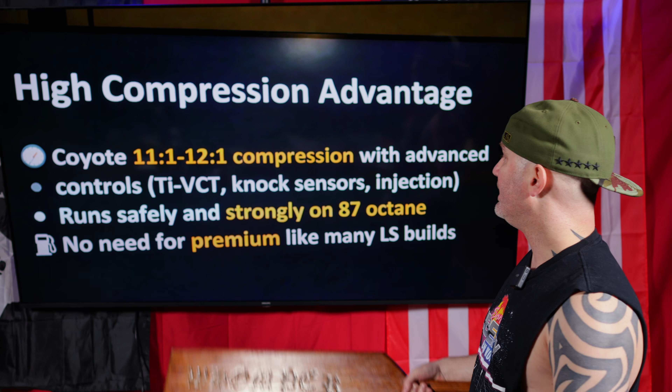Anyways, so out of the box, you're looking at 412 to 500 plus horsepower. You get modern fuel injection, reliability, durability, real world miles per gallon at a high horsepower, runs great on regular 87 octane. The Coyotes come between 11 to 1 to 12 to 1 compression, depending on what generation you pick. They have Ti-VCT, variable cam timing, knock sensors and injections. They run safely and strongly on 87 octane. I'll explain why that's important for a second, but the point is, no need for premium gas like in some LS builds. That's pretty awesome.

So, why is the Coyote one of the cheapest installs you can do? You're like, hey, when I look at a junkyard pull on an LS and I look at a junkyard pull on a Coyote, the Coyote is so much more expensive. How do you claim it's the cheapest? That's because it can run on 87 octane and it gets good fuel mileage.

So your Coyote is going to get about 22 miles to the gallon and you can run on 87 octane, so you're looking at $4 a gallon. To go 100,000 miles, it's going to cost you $18,180. Your LS is going to get about 15 miles to the gallon, and on some builds you're going to be forced to run 91 octane, which is $4.50 a gallon. So to go 100,000 miles, it's going to cost $30,000. Your cost savings on just the fuel economy alone for the Coyote over 100,000 miles is $11,820. Essentially, you're getting a free Coyote if you make it 100,000 miles on this, because not very many of the Coyotes cost over $11,000.

All right, now there is a difference between the F-150s and the Mustang Coyotes, they are not equal. The F-150 variants are made for trucks. They're durable, but again, they're made for trucks. Mustangs, you're looking at higher horsepower, high rev, short runners, advanced camshafts, stainless steel headers. Your F-150, you're looking at torque focused. It's going to have long runners, medium, mild cams, cast iron manifolds, so you're not going to get your headers. Torque curve is going to come on early. So there are differences, there are reasons why you'd want to put a Coyote out of an F-150 into something, like say you're building a truck.

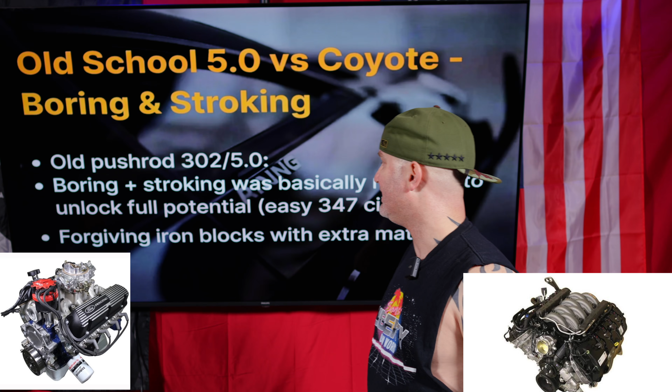Alright, so what's the deal here? The old school 5.0s versus Coyotes - boring and stroking. Back in the olden days, when you're talking about the old 302s or 5.0s, that's basically what they were talking about - to truly unlock their full potential, it was almost mandatory you had to bore and stroke them. Otherwise, you're just not going to get the potential out of it. You can easily go to 347 - that's almost 50 cubic inches more. Easily. You can go even farther than that, but easily out of a 302 block.

Why didn't they just come out with that fact? Why not just make 347s instead of 5.0s? Well, that's basically what they did in the modern Coyotes. They're like, hey, instead of having this block with all this extra material and all this extra room, why don't we just build things more efficiently? Why don't we put almost essentially the max bore and stroke we can in the size of the engine we can to get the most power out of the smallest package? Obviously that's a pretty oversimplification, but that's generally what's going on here.

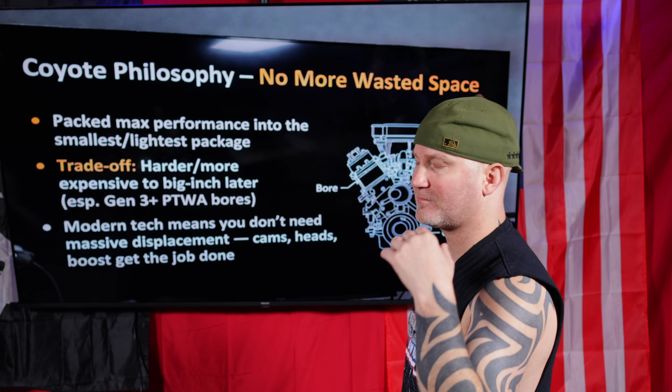So with the Coyote, the philosophy is no wasted space. Everything takes up some sort of purpose. The bore and stroke - yes, you can bore and stroke these, but it's not like old school where you just change the crankshaft, piston, and rods. There's a lot more involved with it. It's more of a niche thing. They're going to put the maximum performance in the smallest package. The trade-off is it's a lot harder to get big cubic inches, but that's not a big deal.

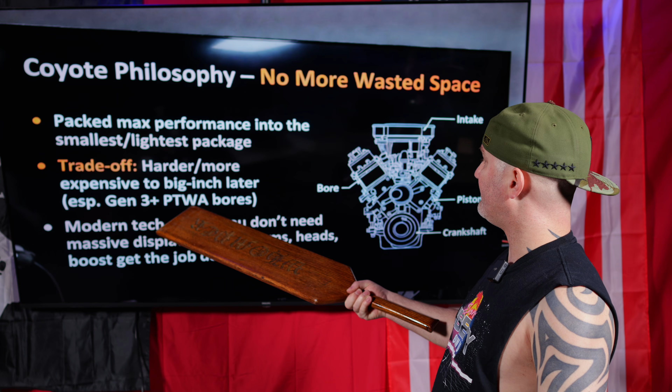Now, the Gen 3s have a special cylinder wall. If you want to start boring and stroking those, you've got to re-sleeve it. So again, it's getting harder and harder to do, but it's okay, because you know what? That leaves the bottom end alone - unless you put so much horsepower on the top end that you blow the bottom end out.

Realistically, now the upgrades, instead of having to go to a machine shop and having your 5.0 bored out, stroked, balanced, and brought back, now you're just doing cam swaps, head swaps, intake swaps. If that's not enough, put a little spray on there. If that's not enough, you can put forced induction on there. So with modern hot rodding, you no longer really have to mess with the bottom end of the block. Yeah, there's performance to be had there, but not really, not like in the old school days. That's a huge advantage for newer tuners coming along, because forget the bottom end - leave the bottom end alone. We're looking at heads, cams, intakes, throttle bodies, stuff like that.

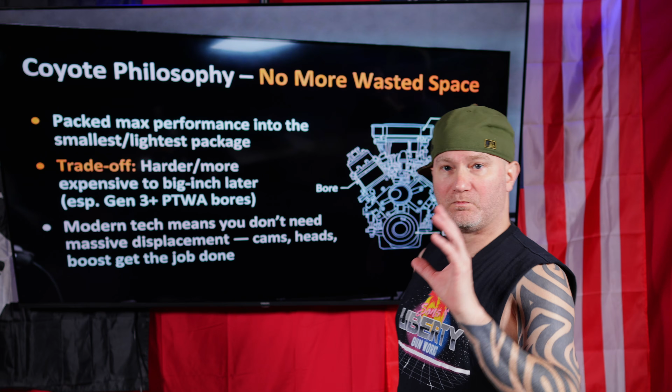That's cool because, like I said, back in the old days, if you truly wanted the hot rod, you had to crack into that bottom end. That bottom end just wasn't going to handle it, because back in the day the bottom end would have like 8.5, 9.5 to 1 compression, maybe even 9 to 1. Who knows, it could be some sort of crazy fuel efficient version. So yeah, even throwing on heads, you can bump the compression up a little bit, but to really get power, you had to crack open the bottom end, bore it out, stroke it again - go to the machine shop. You had to have a relationship with your machine shop. Now you're taking him out of the equation because Ford did all that for you.

Again, you can bore and stroke these - I'm not saying you can't - but is it really worth it? The jury's still out on that, but I'm leaning towards no. Leave the bottom end alone, just play with the top end.

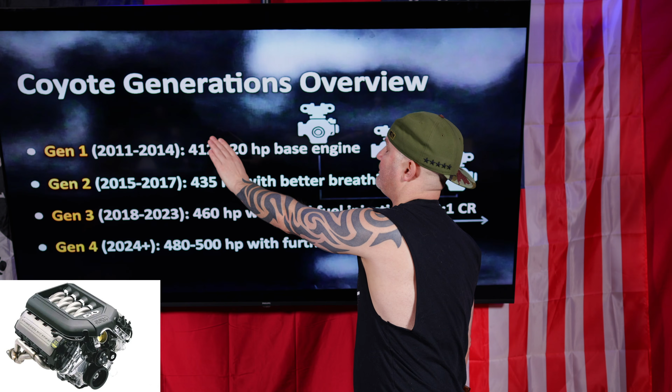Alright, so what are we looking at here? So Gen 1s, that's from 2011 to 2014. On average, you're going to get between 412 and 420 horsepower out of a base engine. Let that sink in for a second. The old 5.0s were like, what, 200 horsepower? 230? I mean, if you're really on point here, over 400 horsepower.

400 out of a stock Coyote. Something that's going to last well over 100,000 miles. You can literally go to a junkyard, pull this out, and you have 400 horsepower. And these are the old ones, so they're already getting cheap.

Gen 2, 435 horsepower, factory, out of an engine that's widely available. This isn't some crazy bow tie Corvette engine you have to hunt down and get this special. No, this is widely available. Between 2015 and 2017, 435 horsepower for the Gen 2. That's insane, the technology we've come to.

Now let's get into the Gen 3s. Almost 500 horsepower, 460 horsepower. And look at the time frame they ran these in. These are widely available. And now you got the dual fuel injection.

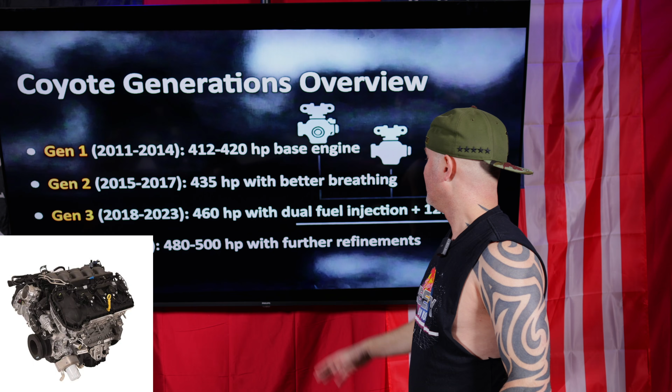So essentially with the Gen 3s, so everybody understands fuel injection, right? There's a couple different methods for it. There's throttle body where it just shoots in. I'll make a whole video breaking this down, but I'm just going to touch on it real quickly. So you have your throttle body where it just shoots in. Then you got where it's above the valves where it shoots in. Now the Gen 3s, they actually have an injector in the cylinder like a diesel. So they got one outside that basically irrigates the valve so you don't get carbon buildup on it, and at low speeds it relies on a fuel injector. When you drop the hammer, it shoots fuel directly into the cylinder, allowing you to run 12-to-1 compression on 87 octane fuel. Just amazing, crazy efficient.

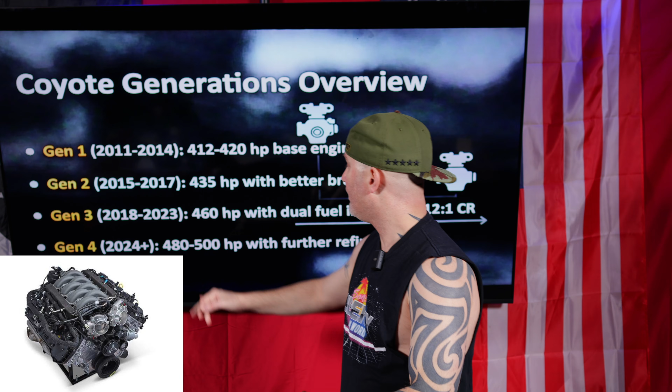That gets you up to 460 horsepower. Then you got the Gen 4s. Who knows how long this generation is going to run, but now we're talking about 480 to 500 horsepower.

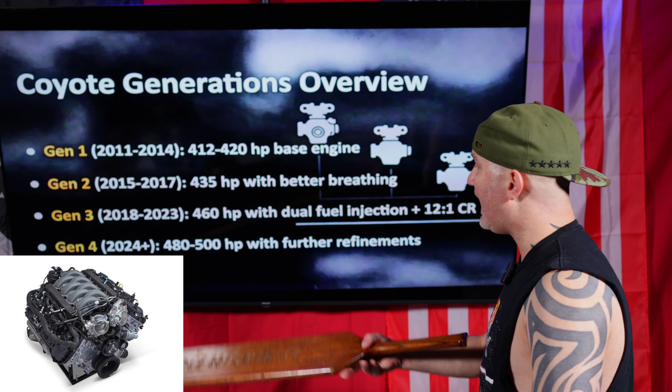The early 2000s, when you told me about 500 horsepower, that was some crazy, unachievable number unless you were going with like just this ridiculous stroked out engine or forced induction or turbo or a bunch of nitrous. It was just this unforeseen number. And you know what? If you hit that number, you're going to be rebuilding that engine like every summer. Things are going to break constantly. Now I can buy this engine out of a junkyard for a couple thousand dollars, go 100,000 miles reliably. I can run this engine straight on down to Florida if I want. Come on back, not even have to worry about any sort of problems with it whatsoever. That's amazing. And then you've got further refinements over the Gen 3.

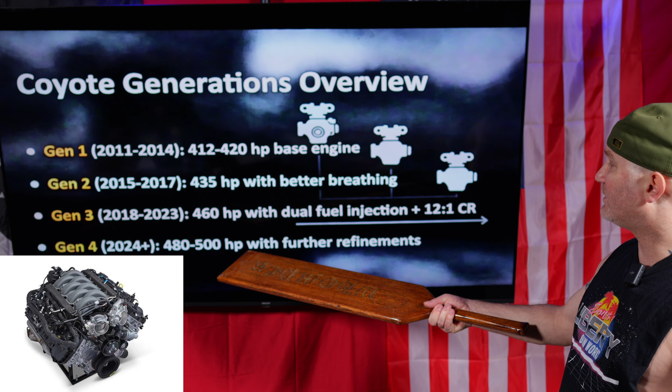All right, so what are we getting in here? The different generations, you're going to be looking at different power levels, obviously, different injectors, different heads, bores. The Gen 3s, you're going to have a big jump in technology. The Gen 3 is like the fulcrum point. If I was doing a swap, I'd be looking at a Gen 3. Yeah, you're just going to get more power as the generations go on and on and on. Can't wait to see what a Gen 5 is like.

So the big jumps we got here, a lot of it comes down to the cam timing. So the Gen 1s, you did have cam timing, but it was more of a primitive behavior. It was an on and off thing. Like, all right, so at this point, if the computer sends this signal, we're going to flip it on, and it's going to go to this degree. That's pretty much how it worked.

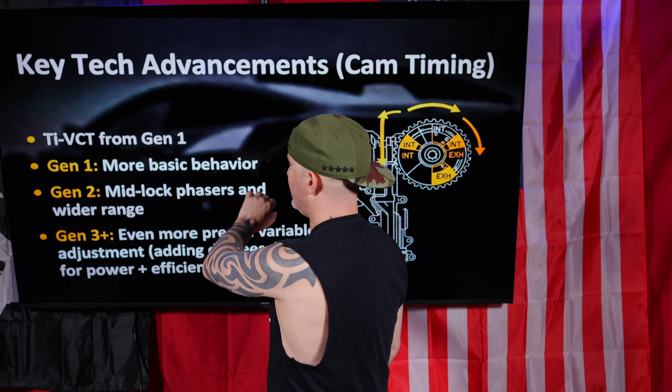Well, as the generations go on, now the phasers are going to lock up in the mid-range, and you're going to have more of like, not an on and off, but like, all right, we want to apply this much cam timing to it, we can. They unlock that ability so it ain't just on and off like advanced and retarded. Now we can go a couple of degrees advanced. And then we can start controlling the exhaust as well. And then it got even more advanced in the Gen 3s. Now you're adding degrees. Now you got exhaust, intake, retardation, and advancing.

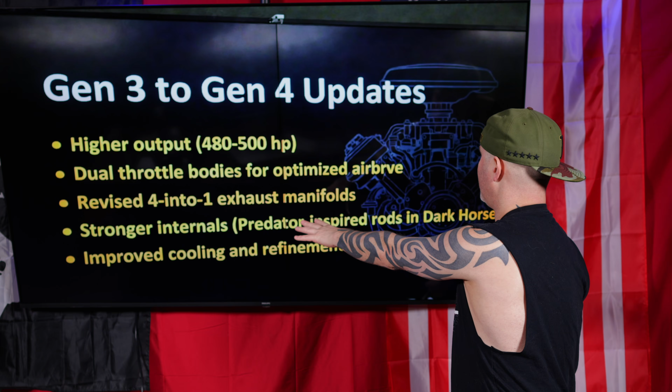Gen 3 to Gen 4 upgrades, we're going to look at higher horsepower, 480 to 500. You're going to look at dual throttle bodies, headers of 4-into-1, stronger internals. Predator-inspired internals in the Dark Horse, so stronger rods, stronger everything. Cooling is going to be improved and refined.

All right, so cylinder technology. A lot of the builders are going to be sticking with a Gen 1 or a Gen 2, because when you get to the Gen 3, now you've got the plasma cylinders. And if you want to start boring and stroking these, you've got to resleeve it. And does anybody want to resleeve it? No, because then you might as well just buy a crate engine that's already sleeved, or just buy a crate block that's already sleeved. So typically your builders are going to be hovering in the Gen 1, Gen 2s. Now your straight up swap dudes, they're going to be Gen 3s and Gen 4s because you get all the advantages - the coating sprayed on the cylinders, the lightweight blocks, just amazing technology.

So what are we looking at for cost currently? I mean, this could change any day. Right now, a Gen 1, you're going to be looking at $2,000 to $4,000. Obviously your mileage may vary depending on where you shop from, but this is a pretty good realistic price range where you can get a junkyard pull from. Gen 2s, $3,500 to $6,000. Remember when I talked about cost savings? $11,000 is what you would save over going with an LS, just on fuel alone.

So you could get, with those savings, a Gen 4. And this Gen 4 would ultimately become cheaper than any LS just because of the cost savings of $11,000. The Gen 4s are as high as $10,000. Now myself, if I'm going to be doing a pull, I'm going to be looking at a Gen 3 or newer because I want the dual fuel injection. Because now I'm going to be at high compression ratio. I'm going to get really cool fuel mileage. It's going to be amazing.

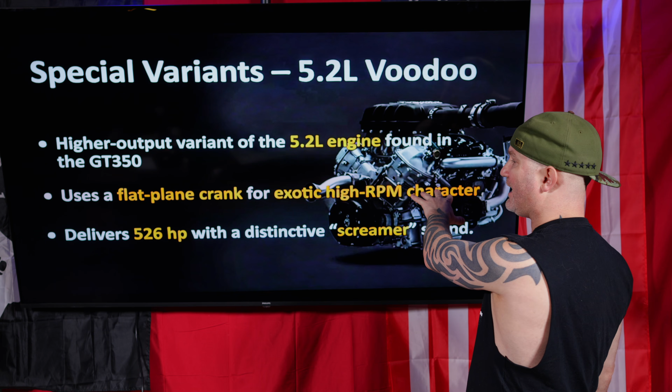All right, now we need to talk about the 5.2 liter Voodoo because this bad boy is its own animal. This is going to be coming in the Shelby GT350s. This is a 5.2 liter engine. What makes it different is the flat plane crank. This is going to get your exotic high RPM characteristics. This is going to come with 526 horsepower, which is just crazy.

And you're going to get that scream, that exotic sound. I can't make the sound out of my voice, but I'll play a little clip right here.

That's the scream you're going to be looking at.

That's the scream you're going to be looking at. And I actually just seen this video that made this great case that all these bougie cars are losing their appeal because now you're just paying for a badge. Back in the 80s, the 90s, and early 2000s, they offered you some sort of performance you couldn't get from the cheaper cars. That's gone now. Look at this GT350 - 526 horsepower, flat plane crankshaft, 5.2 liter engine for a tenth of the cost of one of those exotic cars.

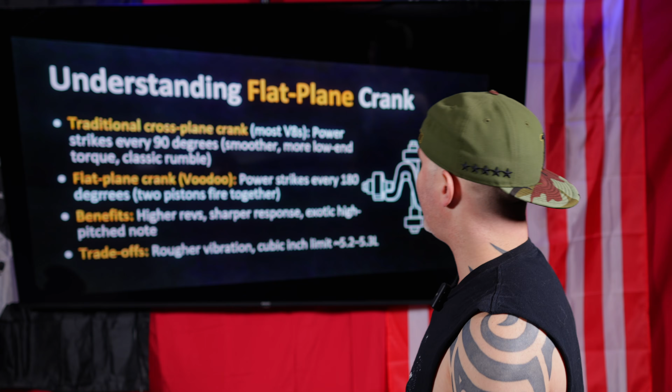So understanding the flat plane crank, I'm going to go into a little bit of detail here, but essentially what you're looking at is your standard cross-plane cranks. This is what you're going to see in your GTs, your normal Coyotes. Every 90 degrees, there's going to be a power stroke. Your flat plane crank has 2 power strokes at 180 degrees. So when the power stroke comes, you have 2 pistons working together at the exact same time. This gives you the high revs, the sharp sound, that exotic high-pitched noise out of what you see out of Ferraris and stuff like that because they use flat plane cranks.

The trade-off is it's going to have some vibration issues. You're also going to be limited to about 5.2 liters to 5.3 liters, which is why the Voodoo is 5.2 liters. When you start going above this, the vibration gets so severe that it can literally vibrate the oil filter right off of the engine. Now there are cases where they will go over this, but that's usually a race one, but now you're going to have to go with heavy counterweights. There's a lot to it, a lot more than I can understand, but from what I read, the balancing becomes such a huge issue. It's just easier if you're going above 5.2 liters or 5.3 liters to just go with the cross-plane crank.

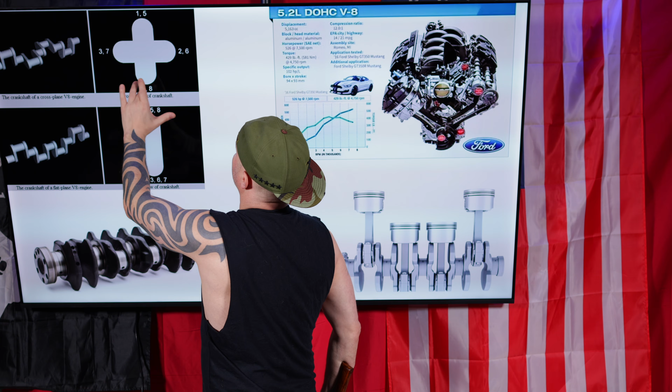So what are we looking at here? This is your cross-plane crank. These are where the cylinders line up. So that means there's always one cylinder on a power stroke.

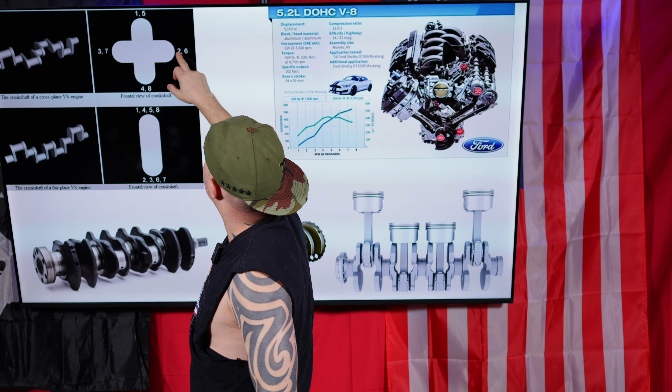Just one, and then there's another cylinder, say this one right here. This would be the power stroke for 2, and this would be the intake stroke for 6.

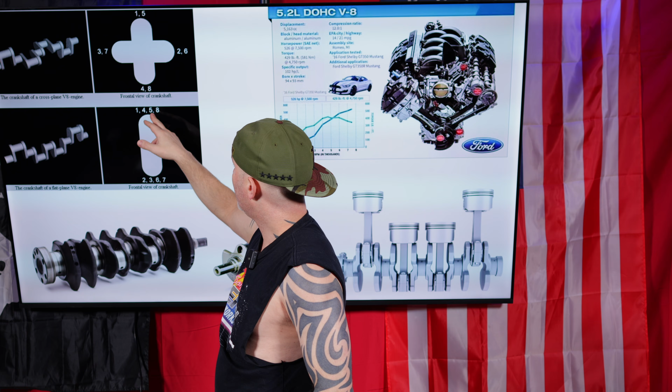Now with a flat plane crank, you have 4 cylinders on each side. See how it goes flat across? Here's another picture, flat across like that. Where this one makes more of a plus sign. Every 90 degrees you've got an arm instead of every 180. So with this, you have 4 cylinders, 2 on intake stroke and 2 on power stroke.

Now this is a 4-cylinder, but this is the easiest way to look at it. Just remember with the V8, you'd have double the cylinders - 2 here, 2 here, 2 here, and 2 here. So this would be an intake stroke and this would be your power stroke. If this was a V8, you'd have 2 on the power stroke and 2 on the intake stroke. So there's always 2 - every 180 degrees, 2 cylinders are touching off and going.

Now you lose a little bit in the low end, but on the high end, this is going to increase your revving. There's just something about how this setup really leads strong into RPMs.

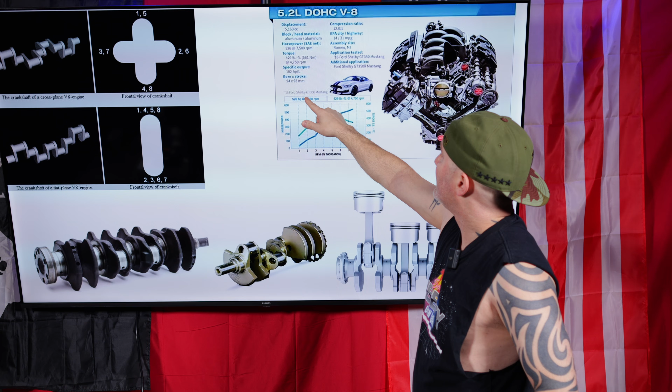Here's an actual Voodoo right here, dual overhead cam. This is the 350, going to come in at 526 horsepower. Look at that RPM range right there - 7,500 RPMs, almost 8,000 RPMs, which back in the day you only saw in NASCAR. Otherwise everything was 5,000 RPMs. That was pretty much red line.

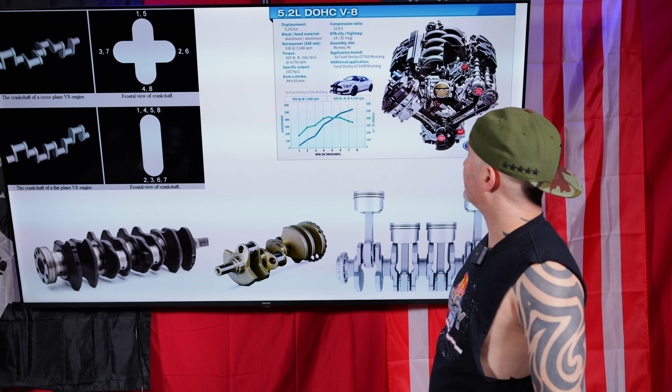Your torque kicks in at the highest at 4,750 RPMs. This is just amazing. Remember, this is where they took the horsepower at 7,500 RPMs, which means it could definitely go to 8,000 RPMs without a problem.

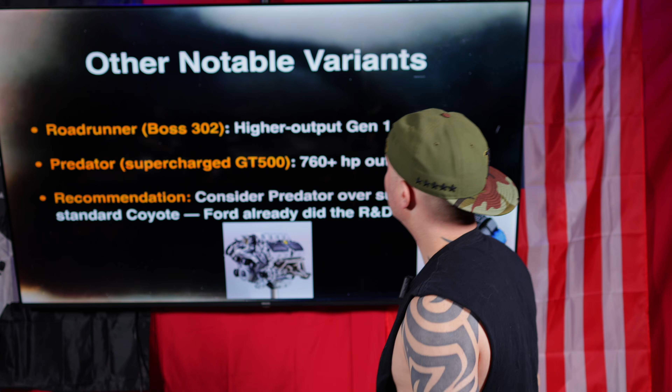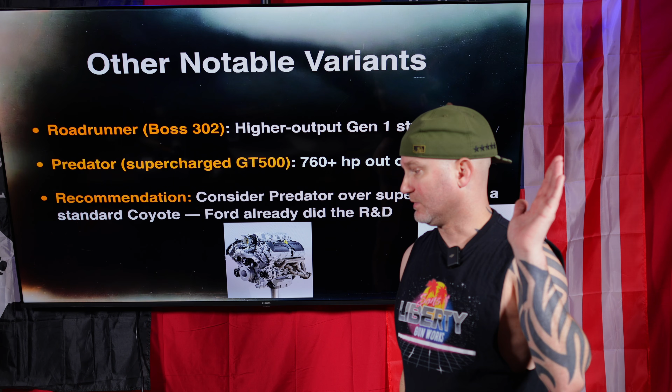So now, what I recommend - if you don't want 500 horsepower, if you want something more, there are exotic engines. For example, you have the Roadrunner or the Boss 302. This is a high output Gen 1. So if you're building, or you plan on building, this is a great option because this is going to have your normal sleeves. This is buildable. Look for the Boss 302.

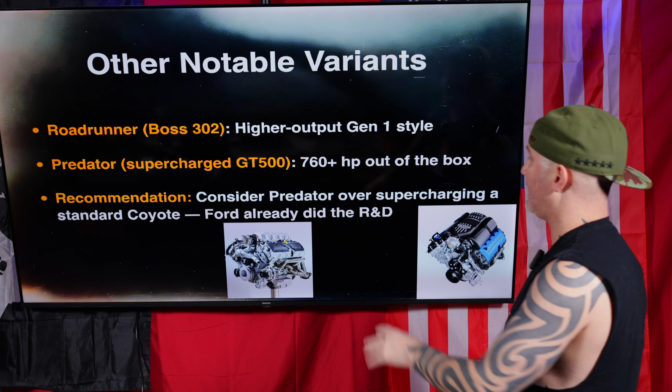Now if you're looking for just high horsepower, what I recommend is the Predator. It's a supercharged 760 horsepower engine. I'd buy this as a crate engine. Why would I buy this as a crate engine, you may be asking? Because we're talking about like $26,000. Because Ford already... whoa, what happened to my TV?

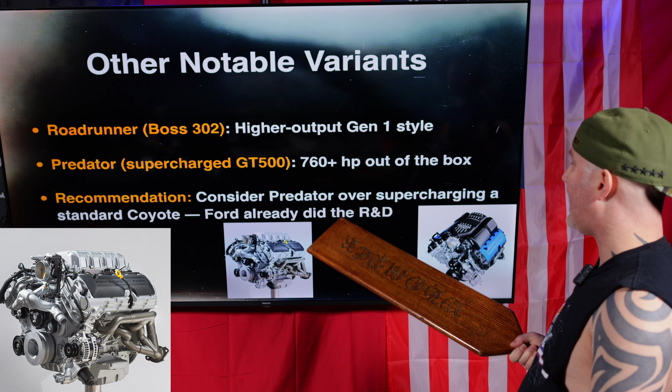Because Ford already spent millions of dollars on R&D. They've already put these on the dynos. They've run them right to explode. They have them on the streets.

Again, you're buying millions of dollars of R&D. Yes, I could take a 5.2 liter Voodoo or a Coyote and juice it up to 760 horsepower. You know what? I'm probably going to be about $20,000 into it with the blower, the intercooler, the fuel system and everything, just getting it on the dyno. That's it, just on the dyno. Now I have to do my own R&D. Now I need to blow up my own engines. Now I need to do my own tuning. You could buy it from Ford already done with a blower already on it, already at almost 800 horsepower.

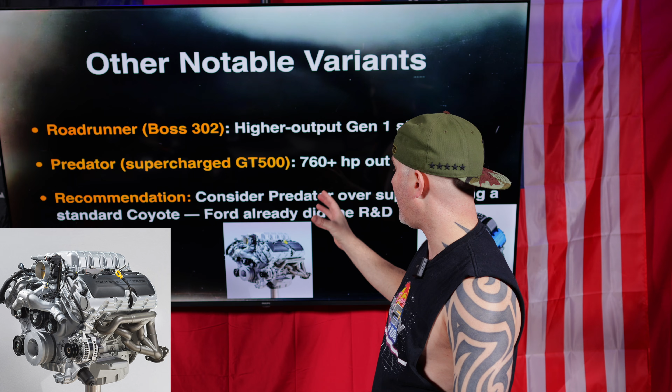This is a beast. Like I said, I'd go this route because you're buying their R&D. You're buying a complete ecosystem. They already figured everything out. They already know everything there is to know, and it's done. You just lower it right into your vehicle.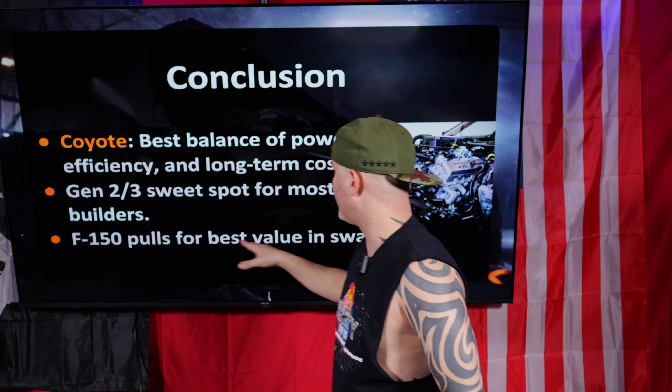So, considerations for the best power balance - if you're going to be building, I would stay probably at a Gen 2. If you're doing a swap, the sweet spot right now because of the price is like a Gen 2 or Gen 3. I'd lean more to the Gen 3, spend a little bit more, because then you get that dual fuel injection. Now if you're looking for maximum savings but still want to go with the Coyote, the Ford F-150 pulls the best way for value, because it's just so available.